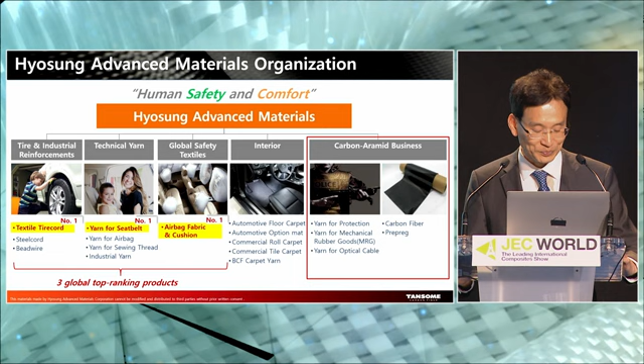Hyosung Advanced Materials, which I belong to, has a motto of 'We assure human safety and comfort through optimized advanced materials.' It has 5 business divisions. The reinforcement division makes tire cord made of polyester and steel. Technical yarn division produces high-strength industrial yarn. Global safety yarn textile produces airbag fabrics and cushions. Interior division manufactures carpet products for vehicles. Carbon aramid division, which I belong to, deals with carbon fiber and aramid fiber businesses. This division is the newest one in the company, but is also the fastest growing division as well.

Okay, from now on, I'd like to talk about Hyosung's carbon fiber product, TANSOME. TANSOME is the brand name of Hyosung carbon fiber. It's a combination of tan and something, which implies that people can make something special or extraordinary using Hyosung's carbon fiber products.

Now I will explain the brief history of TANSOME. Hyosung began its R&D in 2008 and developed H2550, a high-performance standard modulus product and precursor simultaneously within 2 years using our own technologies. In 2012, the company developed H3055, an intermediate precursor and carbon fiber, also using our own technology. In 2013, it started commercial production with a 2,000 ton plant in Jeonju, South Korea, and has since increased its capacity to 9,000 tons as of today.

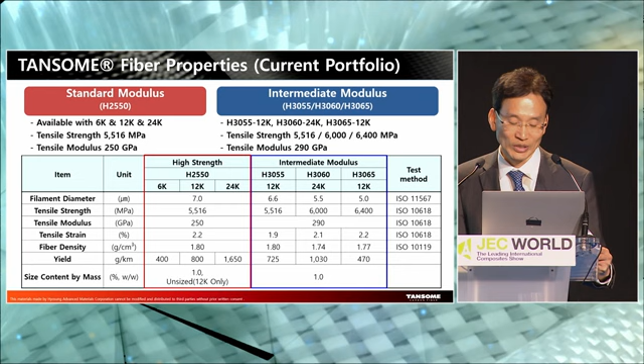Now, the company has 2 types of products: a standard modulus product and an intermediate modulus product, respectively. The detailed characteristics of the products are shown in the table. The main feature of the standard modulus product is its high tensile strength. For example, in the field of high pressure vessel application, it has received a lot of positive feedback from many customers, and it is growing its sales rapidly for this application.

Hyosung is on its way to expanding its product portfolio. In 2019, the company developed an unsized product for thermoplastic composites. And last year, developed a high-strength intermediate modulus product, H3065, in collaboration with Korean academic institutions.

The H3065 is a high-strength intermediate modulus product, developed through collaboration of industry, universities, and institutions such as KAIST, KIST, KCARBON, Jeonju University, and Hanbat University. Hyosung took the lead in developing the precursor and carbon fiber, while other domestic institutions and universities were mainly in charge of carbon fiber analysis and processed products related aspects.

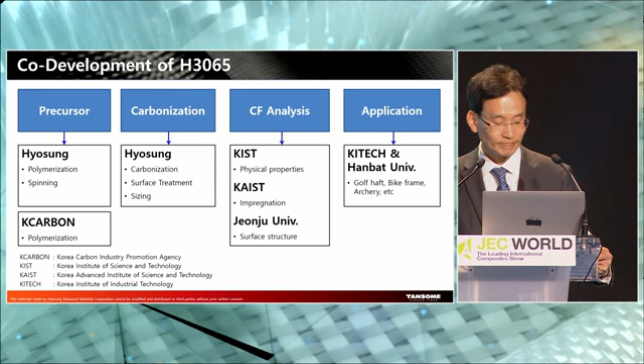Let me briefly introduce the target properties of the high modulus product line. The company plans to cover the modulus range from 325 to 430 gigapascal and aims for strength up to 7 gigapascal. Once development is complete, the company will proceed with promotion accordingly.

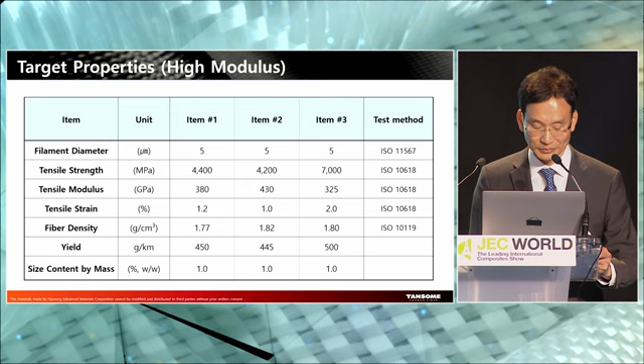While the company basically focuses on developing carbon fiber for aerospace applications, it is currently also working on developing resins and prepregs. The primary goal is to develop resin systems that meet aerospace requirements. Furthermore, it plans to evaluate composite material properties through the oven curing of high toughness prepregs.

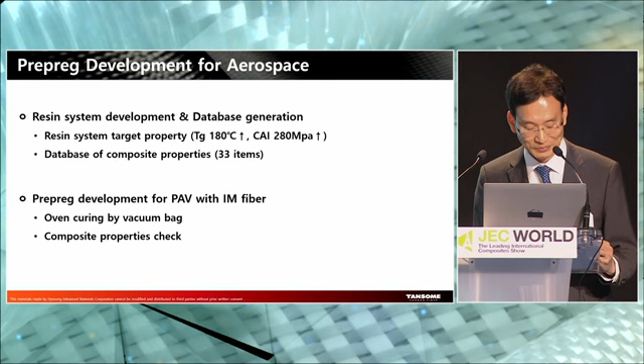This is a photo of our production site in Jeonju, South Korea. The company is currently operating up to 4 lines. As you can see on the right side of the picture, it already secured an additional expansion site where 6 additional production lines can potentially be added in the future.

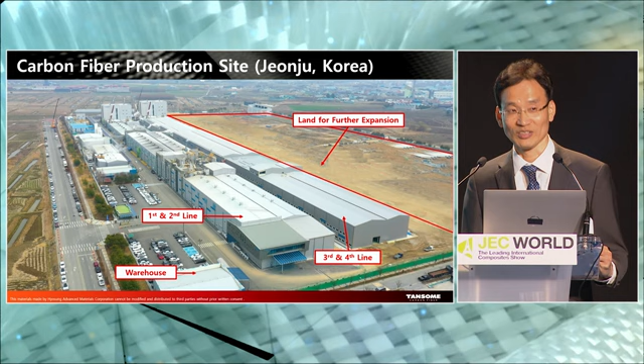Thank you. Thank you for your patience.

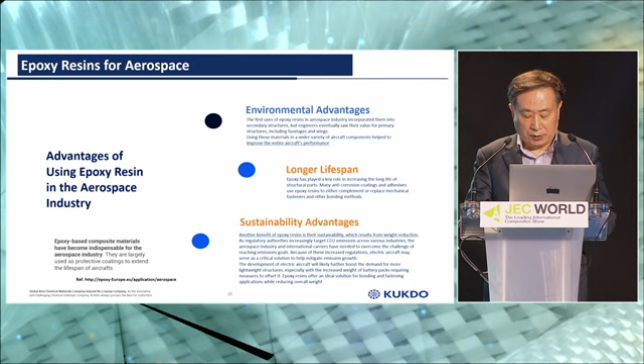So regarding aerospace, why do they use epoxies for composites? Because of environmental issues, longer lifespan, and sustainability advantages. Regarding the composite market for aerospace, what kind of epoxy are we supplying, and what development are we doing? Of course, for epoxy resin for aerospace, we supply bis A type and bis F type, but in many cases, because of heat resistance or mechanical property and high performance requirements, we supply high performance epoxy resins such as amino epoxies, multi-novolac, and toughened epoxies. We also supply these as a system - resin with additives or reactive diluents, as resin part and hardener part. And regarding sustainability, we are focusing on bio, what we call green composite, for aerospace, for both the interior and structure side.

We are developing new chemistries, not BPA-based, not petrochemical, bio-based epoxy resins. And also, we have responsibilities about recycling, so recyclable epoxy we are developing.

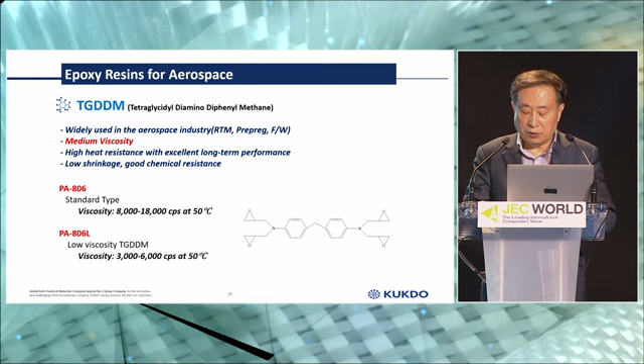This is the most popular grade for the structure part of aerospace, tetraglycidyl diamino diphenyl-methane. It has very high heat resistance, and we have 2 different grades of distilled materials of these amino epoxies. This is 3-functional, we call the triglycidyl para-aminophenol and meta-aminophenol.

We have PA-805 and PA-808, these 2 grades. Also, they are popularly used for this kind of products.

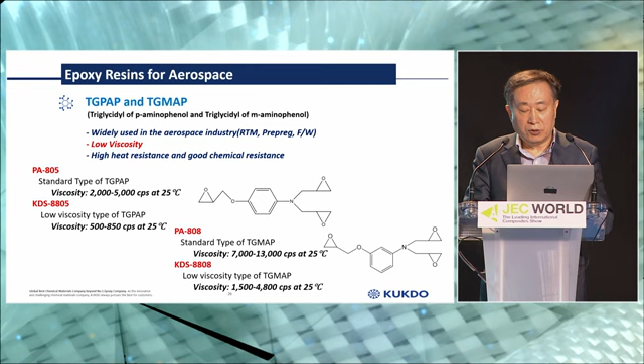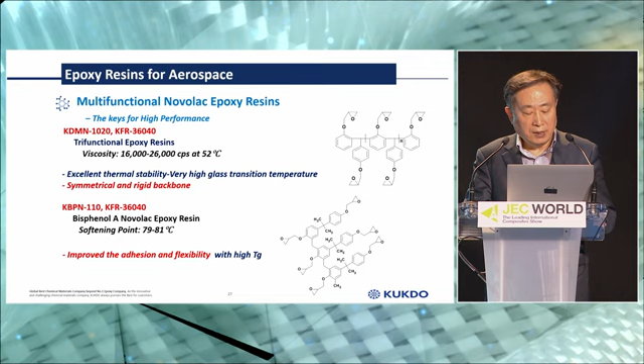We are also developing and supplying the market multifunctional novolac resins, mostly for heat resistance and high mechanical properties. So bisphenol A novolac epoxies or bisphenol F-based novolac epoxies, multifunctional, you can easily have more than 200 degrees Celsius of heat resistance, for high TG purposes.

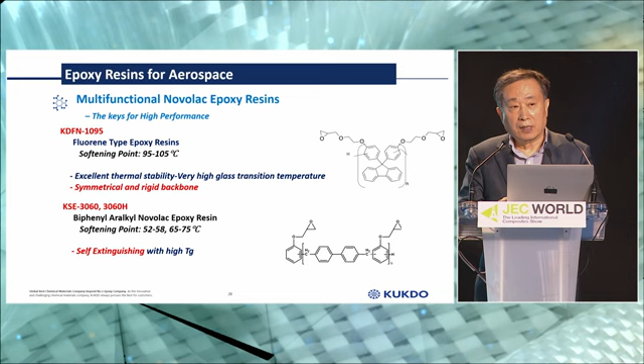This is the multifunctional novolac system. We are manufacturing this novolac resin for our internal captive use. So we can design many different types of novolac resin, like multifunctional or BPA novolac, this kind of things.

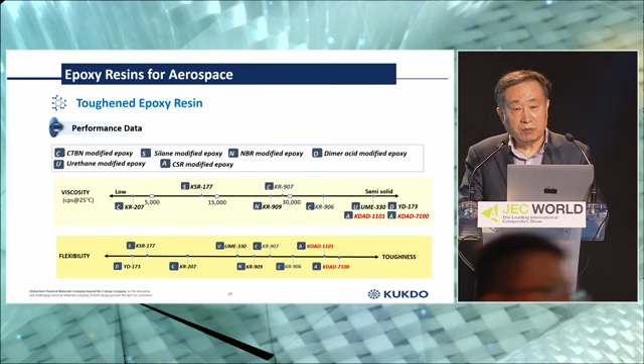For details, if you have questions after my speech, you can ask me separately.

Recently, the aerospace area, aircraft makers want to have mass production. In the past, aircraft makers didn't mind the cost, but now they're competing to achieve low cost, fast manufacturing. So they used to do many different processes, but recently, not pre-preg autoclave, they want fast track, fast curing with RTM, resin transfer molding system.

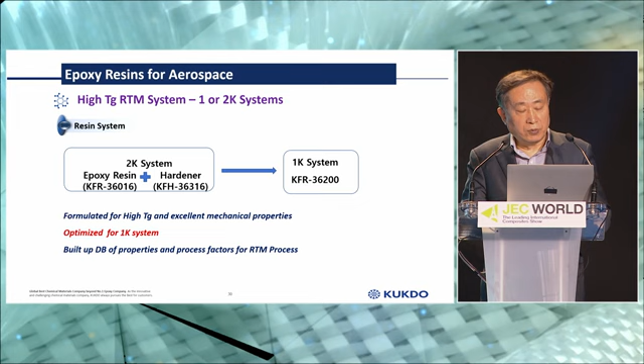So we are introducing to the market resin transfer molding for structure parts of the aircraft. This RTM system provides high mechanical properties, fast curing, and high heat resistance, as you can see.

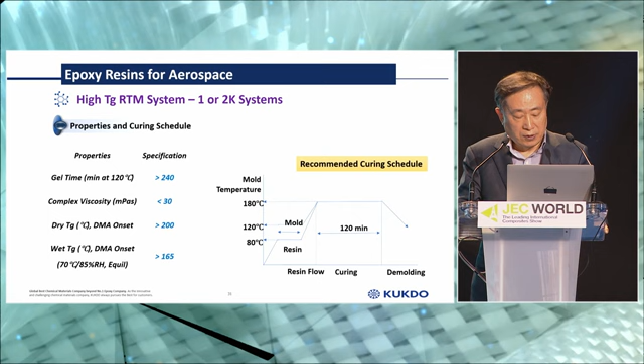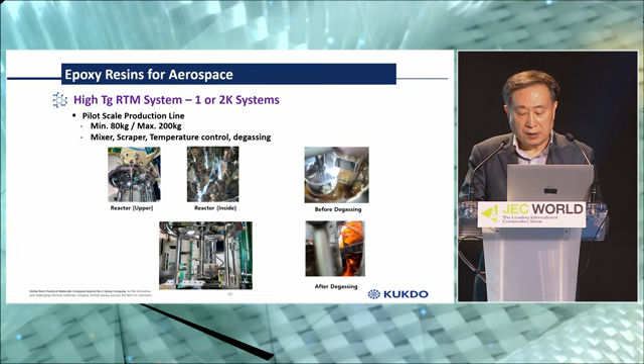And this is the evaluation result and the process of how we achieve that.

Now we talk about sustainability. Carbon neutral - every country has some national net zero commitments, and Korea is also following that. Kukdo is trying to make bio-based epoxies and recyclable systems.

As you can see, glycerin-based ECH, we call it partly bio epoxies or 100% bio epoxies. We are supplying the market, especially in Spain and in Europe, like in France, supplying our important customers with this kind of bio epoxies to make sports boats or other composite materials.

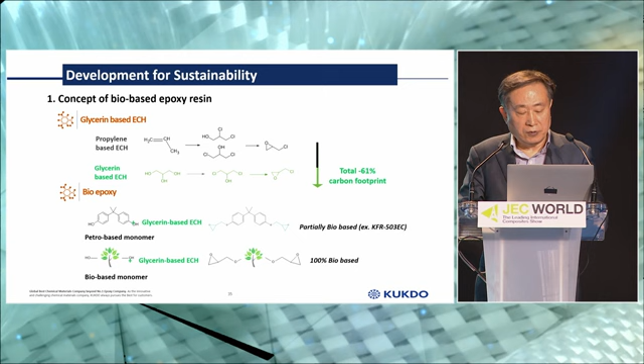And also for aerospace, we are trying to make it with the infusion system or prepreg system based on these bio epoxies. Our target for bio epoxies by 2025 is a 100% bio system, which means not petrochemical epoxies.

Already for wind blades, some wind energy applications, we are supplying and being evaluated with our system, bio content around 45%. You don't need to change cure conditions, and you can have high performance cured properties without difficulties.

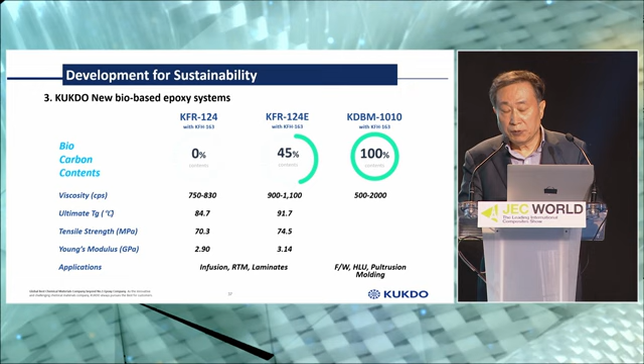So, Kukdo recycling: now carbon composite or glass fiber composite is being used for many applications. And now, like wind energy, wind blades, after 25 years we have concerns about recycling.

So we want to have an easy and low cost recycling system based on different chemistries, 100% bio, self-degradable epoxy systems, but which have good enough mechanical properties. So now Kukdo is introducing to the market, for sustainability, bio-based epoxies, and developing bio-based epoxies.

We are co-developing with a university, and there is a company, KCTech, in Korea. They are very strong in recycling technologies. So we are introducing self-degradable or bio-based epoxy which is easy to decompose, and they are developing the process.

So we have the facility, the company's technology of the process, and the new chemistry. We can have a very good sustainable epoxy system.

If you want to have some trial for the bio-based one, I believe at this moment we don't have mass production, but from this year, from September, we are going to start mass production of the 100% bio epoxy, and we are recommending it for any applications.

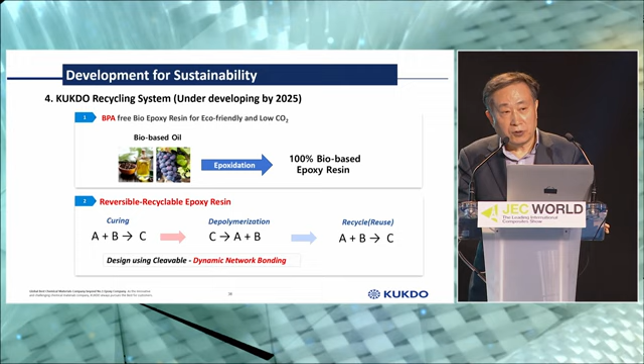Dr. Park, thank you very much.

Moving on, our next speaker is Yoonho Cho, Managing Director of Hankuk Carbon, the largest producer of composite intermediates in South Korea. He'll be telling us about how just such an intermediate composites company fits into a sustainable aero-mobility future.

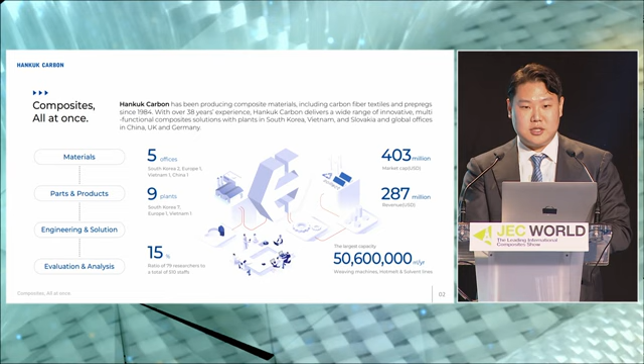Even though we've been struck hard during COVID, financially we expect to forecast nearly $350 million this year, so we're seeing some post-pandemic market drive. We have 9 plants in Korea, Vietnam, and Slovakia, with representative offices in China, Germany, and UK.

Our business areas have been focused on automotive, aerospace, sports and leisure, construction energy carriers, and electronics. We're a very small company, but we are in very different and big industries. We're here talking about future aero-mobility, and one of the core functions we see in the future is bringing different aspects of industries together.

For instance, UAM, urban air mobility - we're seeing lots of technologies that we would expect to use in the automotive industry, but using aerospace qualifications and certified methods of production.

Our core technology comes from weaving and impregnating fabrics, whether it be UD, NCF, or plain weave, and then manufacturing these intermediate materials, whether it be RTM, PCM, or autoclaving. We have our own in-house facility, not because we want to be involved in all methods of production, but because we needed to accelerate and get fast feedback on the limitations of what we can do at different methods of production.

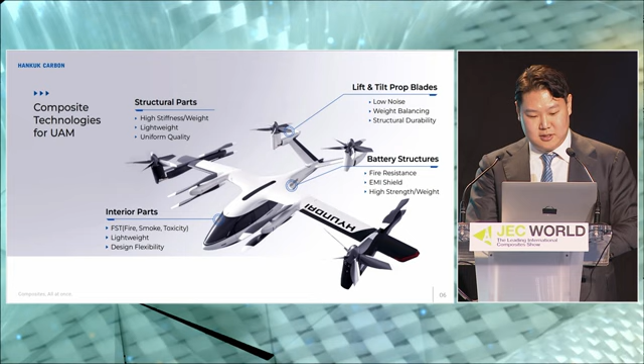Regarding this aspect, for structural parts, we are using epoxy-based prepreg with high toughness and high TG. It is under validation at the moment, but we believe this will be ready in the market within coming years.

Flexible cure methods is something we are also working on, B3HT. It's a type of prepreg where we can have different staged curing cycles.

For interior parts, we're actually a Boeing certified supplier for interiors. We already have AS9100 and we are listed on QPL, and we're supplying phenolic-based prepreg for aerospace industries.

This is a concept of fast curing for us. We believe that in order to compete against metallic-based structures, we need to be able to cure and manufacture parts within minutes. This is where we hope our technology can be used in the UAM industry. So our target curing time is to be under 4 minutes for all cycles of prepreg.

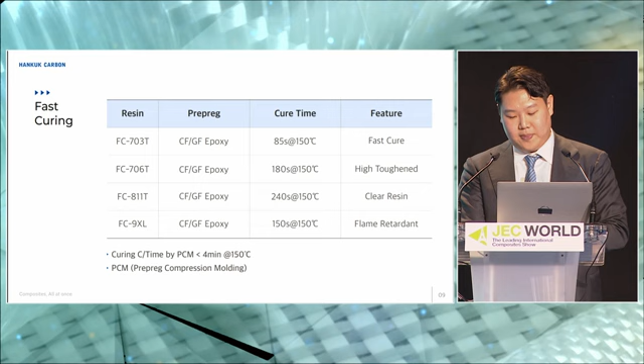Flame retardancy, again, I think will be a more and more important factor in this industry. As you see, a lot of electric cars are becoming an issue with flammability, and we think this will also be the same for urban air mobility. So we're bringing a fast cure resin system with high flammability resistance.

These are the 4 main products we have in line. The FC9 XL series has been awarded the JEC Innovation Award in 2020, but we have yet to use this application in an actual product. We're still in R&D phases, but we think by the end of this year we'll have some good news, and we'll see actual product realization within this year.

This is a common sandwich structure panel, but I put this into this presentation because you cannot have one perfect composite material that can serve all functions. We want to be a composite company that can supply multi-function, multi-material sandwich structures for press compression molding technologies.

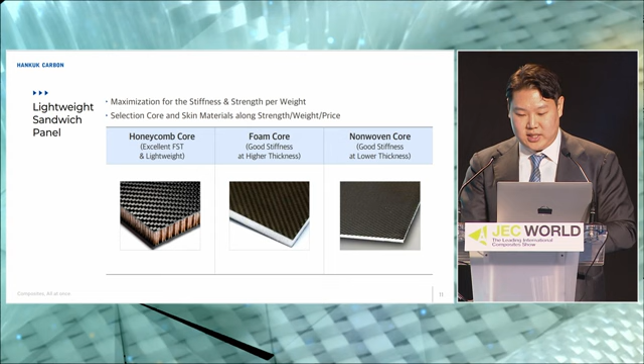Internally, we have engineers of nearly 79 people out of 510. So we're investing 15% of our HR into engineering, and one of the core functions we're investing in is how to realize from prepreg to an actual product.

Through government programs and collaboration with companies, our strength is in developing the iron bird—actual iron birds and thrust test rigs—to test what is the optimal power pack solution for UAMs. So with ground electricity and with inverters and motors, we would develop a prototype of a propeller blade, and then through optimization, finding what is the perfect RPM for this motor, what is a good shape and structurally what kind of propeller we need, is our core strength.

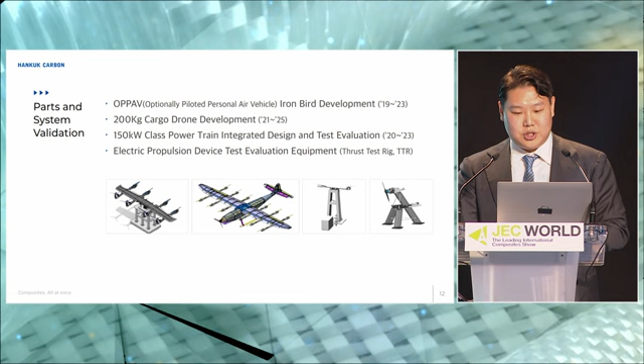We're currently involved in 4 different kinds of programs. One is the optionally piloted personal air vehicle, which is doing a flight test right now with our material and our propeller. With LIG, we're developing a 200 kilogram cargo drone. Another government program led by us involves developing a 150 kilowatt class power train solution, which we're evaluating.

Finally, for sustainability, there's very limited things we can do as an intermediate company. We believe what we can do right now is being ready for the future. And how we can be ready for the future is, as mentioned, being in the automotive industry for mass production, being in the existing aerospace industry for qualification, certification and providing quality, and thirdly, how to make our company environmentally friendly.

One of our efforts in doing so is using 40% of all our electricity consumption through solar panels, which is already established. We're constantly checking our life cycle carbon footprint, and we're investing in how to recycle our used carbon prepreg and extract carbon fiber from a finished product.

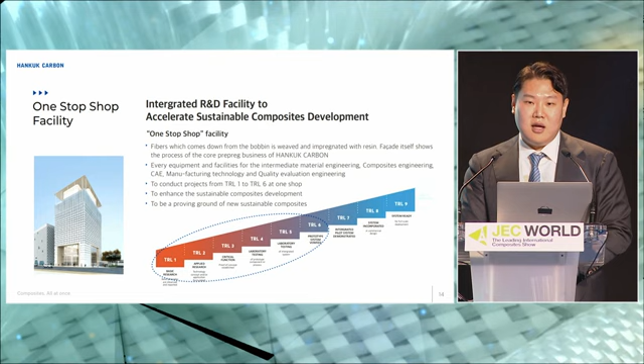Finally, I want to say we have a new R&D facility in the Gimpo area, which is 10 minutes from Gimpo airport and about 35 minutes from Incheon airport. We believe this one-stop shop facility, where we can collaborate with lots of different companies in the world, will allow us to develop from TRL level 1 to level 6. We want to be the one-stop solution for prototyping from materials to an actual product, and we hope this will be the proving ground for new sustainable composites.

I tried to keep my presentation short, but I hope it isn't too short. If you have any more questions, feel free to visit us at N22 at Hall 5. Thank you.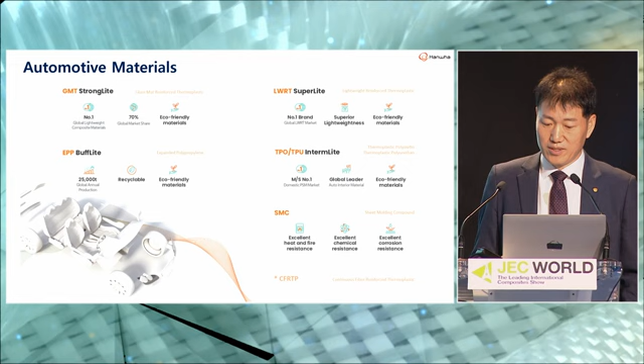We have glass mat reinforced polypropylene and chopped fiber lofted reinforced lightweight reinforced thermoplastic (LWRT), expanded polypropylene, TPO and TPU sheet, and thermoset sheet molding compound. Lastly, we can supply continuous fiber reinforced polypropylene and polyamide.

We are now trying to develop other kinds of materials. I think I'll have a chance to introduce something new in the future.

Based on the various kinds of material technology, we have developed various processing technologies in our global plants. I think Hanwha has outstanding strengths in the field of compression molding.

So you can see, for example, GMT compression molded rear bumper beam, front stiffener, and seat back. We can also supply LWRT based headliner, body undercover, luggage board, and so on.

We are now trying to find some new applications with a cost-competitive solution.

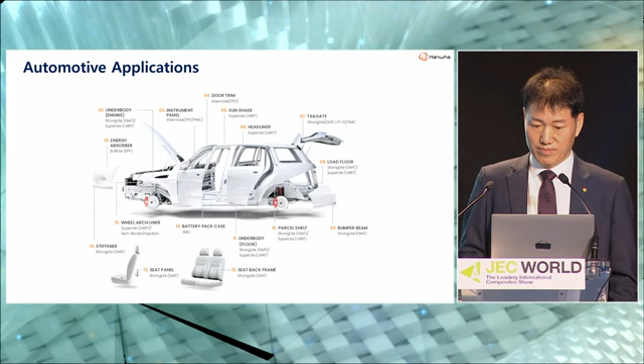The other area we are focused on is solar materials, such as ethylene vinyl acetate (EVA) sheet for solar cell encapsulation, and polyester type backsheet.

We have a close partnership with Qcells, a module maker. They would invest $2.5 billion to build solar power manufacturing value chains in the United States. So we are also investing in the USA to expand our manufacturing capacity.

From now on, I'd like to share some information about our ongoing projects. Let's get down to something new.

The first one is composite parts for electric vehicles. We have worked on battery upper and lower cases based on an existing platform, meaning it can be used for both ICE vehicles and electric vehicles.

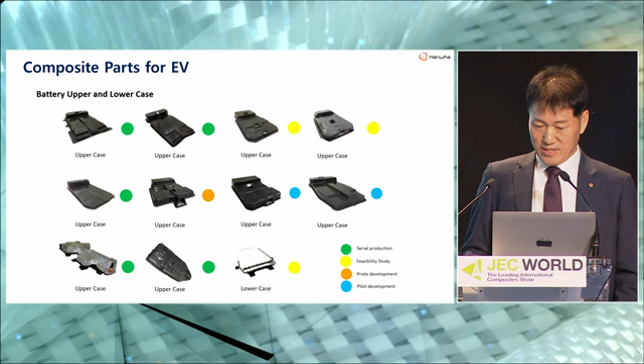Recently, there are some car OEMs adopting their unique skateboard platform. That makes us develop a high impact toughness SMC.

So we developed a hybrid concept, meaning the combination of short fiber reinforced SMC to obtain processability with woven fabric reinforcement to improve impact toughness, to protect against external shocks during driving.

Recently, we are going to produce parts for Kia EV9, and we are talking about more projects with Hyundai and Kia.

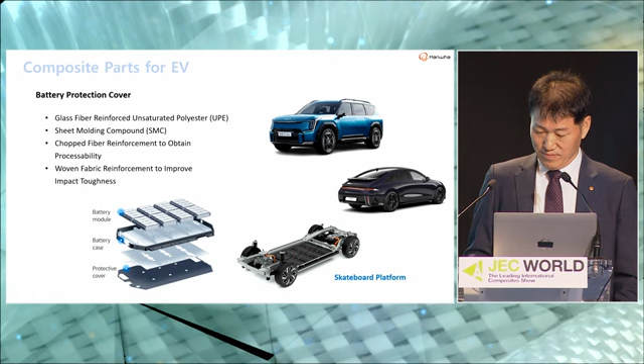The second one is fairing parts for eVTOL. There's a need to make a nacelle for the XP1 butterfly from Overair, a component maker in the United States.

We tried to use a vacuum bag only curing process instead of autoclave technology to reduce the part cost and reduce the investment cost.

If you want to see the nacelle prototype, please visit our booth in Hall 6.

We tried to optimize the processing condition to make that kind of big part. It was not easy to optimize the temperature and time and so on, but we could make the right manufacturing process.

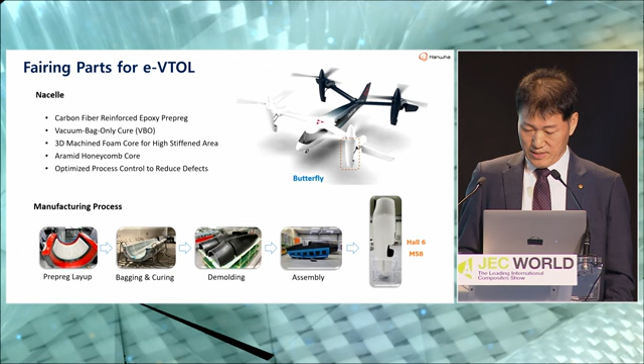The next one is about 3D printed parts for satellites. We are co-working with Satrec Initiative, a high-resolution imaging satellite maker headquartered in Korea. We want to use carbon fiber reinforced PEKK, polyether ketone ketone.

We tried to use dual nozzle 3D printing, followed by compression molding, to minimize the defects. It's a small but very high performance part, so we tried to use 3D printing technology instead of autoclave.

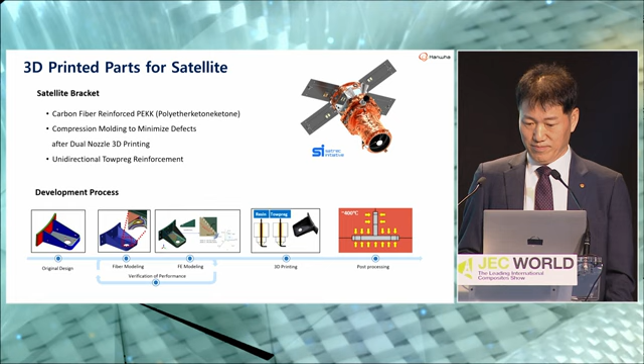The last one is pultruded parts for solar modules. There was a demand from our customer to replace the aluminum frame with a composite one.

We made the decision to apply pultrusion as a molding technology because it can form a continuous fiber reinforced three-dimensional profile. We considered polyurethane as a base material instead of epoxy to reduce the material cost.

We also considered a closed injection box to get better impregnation of glass fiber during the process.

We optimized the shape and thickness based on FEA simulation and thermal expansion analysis results.

Recently we got feedback from our customer that the composite-applied module passed all kinds of engineering specifications, including wind pressure, snow pressure, flammability test, and so on.

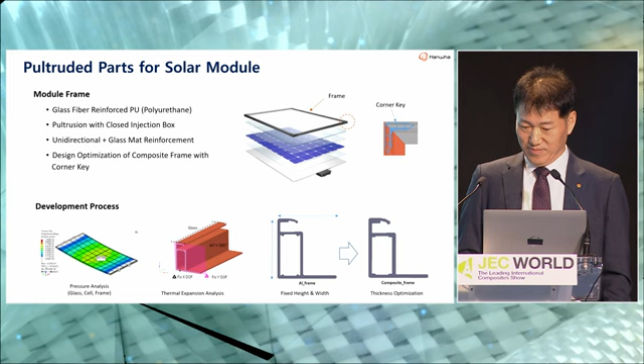I looked around Hanwha's current business areas and some ongoing projects. What will be the most acceptable technology for future mobilities?

In my opinion, there will be new opportunities for composite researchers and engineers interested in purpose-built vehicles and advanced air mobilities.

I think the above mentioned technologies—SMC, VBO, 3D printing, and pultrusion technology—will be good candidates for future mobilities.

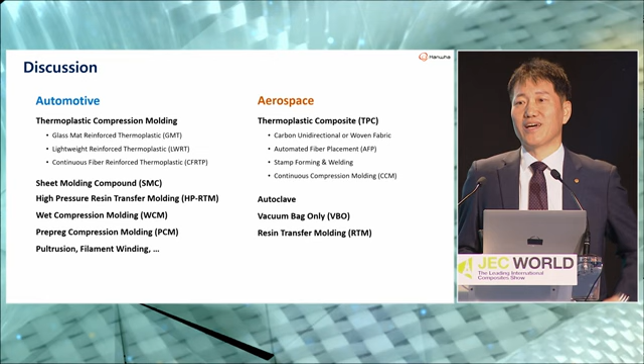The last thing I'd like to say is that Hanwha has accumulated experience with thermoplastic composite materials and thermoset composite materials, and all kinds of processing technologies. We are ready to have an open discussion with all of you.

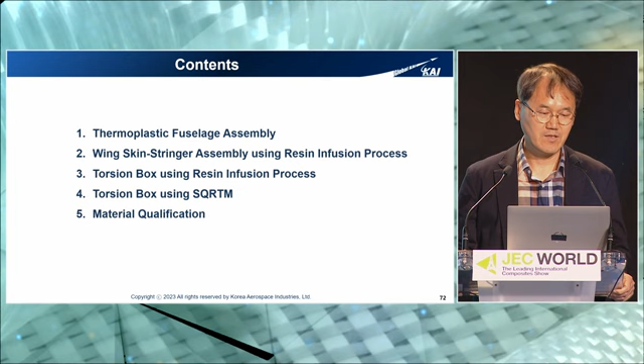KAI targets to make more than 60 aircraft per month with equivalent quality and cost. The last topic is material qualification.

For the thermoplastic technology, KAI wants to implement the whole fuselage structure with thermoplastic materials. We selected LMPAEK material with unidirectional tape. For the large skin, we selected an AFP machine to lay up the large curved skin and oven consolidation, not autoclave consolidation. For a long stringer, we selected a continuous compression molding process, and for smaller parts such as frame and clips, we applied a stamping process.

We also pursue eco-friendly manufacturing technology by using recycled materials to make the window frame. Finally, we are conducting induction welding and resistance welding processes for the final assembly.

You can see the final part configuration, which is 3 meters by 2 meters in size. We finished the TRP, technology readiness part, in 2021 successfully. This program is ongoing, and by the end of this year it will be finished.

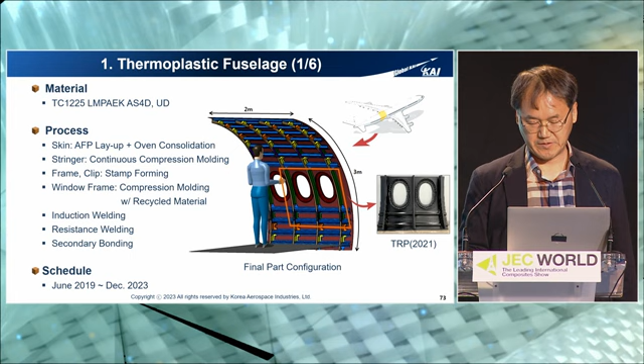This slide shows the skin manufacturing process. We selected 0.25-inch tape, with an AFP speed of 0.5 meter per second. You can see the bagging process and oven consolidation process. We conducted C-scan to detect internal defects and 3D scanning to check the final part design, dimensions, and tolerance.

We also conducted destructive tests to check the internal quality of the part, and DSC tests were conducted to check for the existence of cold crystallinity.

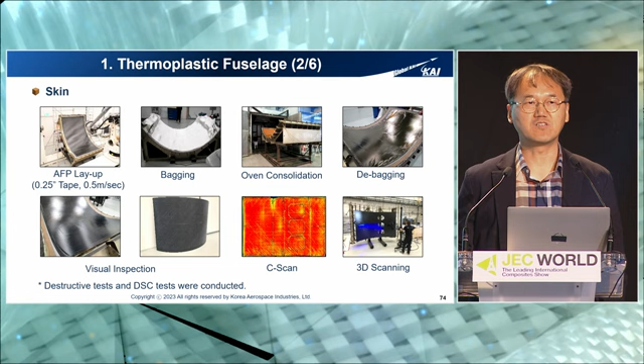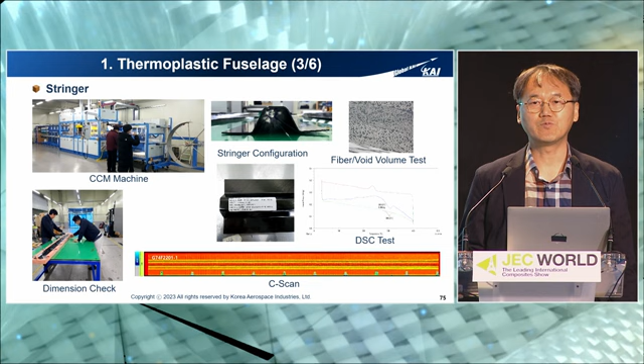This is a CCM machine used to make the stringer, having a hat-section profile. We conducted fiber volume and void volume tests, accepting a minimum percentage of void volume, along with dimension tests, DSC tests, and C-scan. We spent a lot of time checking the optimum temperature, time, and pressure, and we finally got the optimal process window currently.

For the frame and clip manufacturing process, we used 2 kinds of presses. The bigger one is a 400-ton press with a 2 meter by 1 meter bed size. The smaller one is a 100-ton press, with a size of 0.5 meter by 0.5 meter. Both presses have IR heaters to provide high temperature just before applying pressure.

KAI is developing several kinds of configurations, such as frame, stabilizer, double folded clip, long clip, and L-shape parts. The difference from previous technology is that we used unidirectional tape pre-preg, not fabric. We conducted destructive and non-destructive tests to check internal defects and quality issues.

Void volume and DMA tests were also conducted. Most of the results are within our expectations.

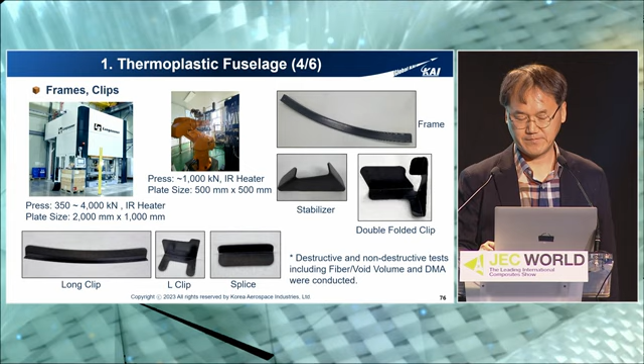As I mentioned, for eco-friendly manufacturing technology, we shredded and crushed previously consolidated parts to make recycled material with approximately 1-inch fiber length, and we added extra resin pellets to provide more viscosity when heated, to make the mix. Finally, we achieved a 30% fiber volume window frame.

Currently, to give more structural reinforcement, we are starting to apply pristine, semi-prepreg material over the window frame structure.

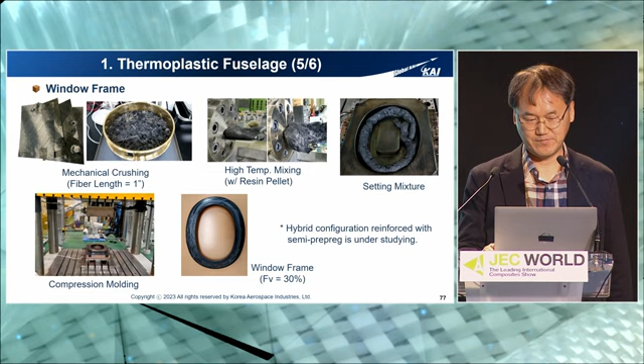This part development program will also be completed within this year. I hope to explain with the real final assembly next time.

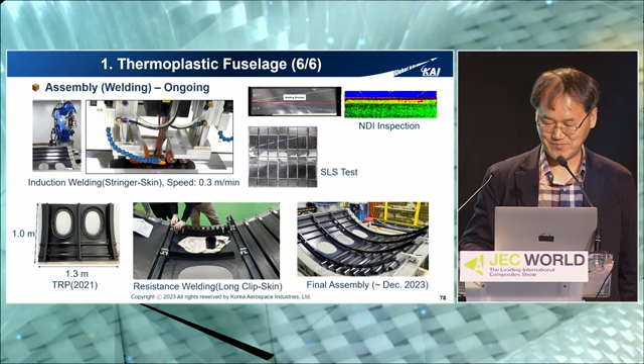Second one is the wing skin stringer module in KAI. We selected HiTape unidirectional dry tape material, 0.25 quarter-inch unidirectional tape, with resin system RTM6-2. For the large skin, we laid up with the AFP machine, and for the stringer, after lay up with the AFP machine, we used a hot drape forming process to make the L-shaped tie.

We also conducted TRP parts in 2021. You can see the final part size, 4.1 meter by 1.5 meter, with some controlled parts.

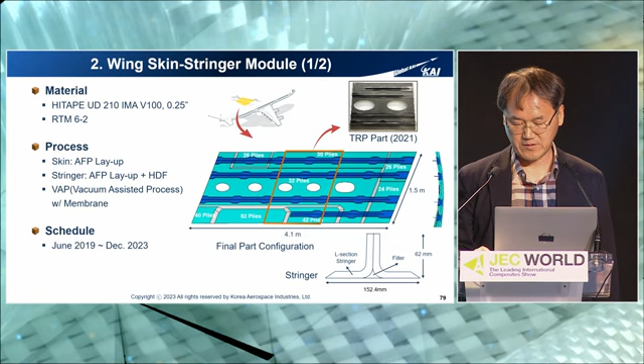This slide shows the manufacturing process. The AFP machine speed was 0.6 meter per second. You can see the hot drape forming pictures.

The difference from the previous one is the relatively lower temperature hot drape forming, meaning 120 degrees Celsius, compared to the 170 or 160 degrees Celsius hot drape forming used previously. This will also be completed at the end of this year.

Currently, we finished the final parts manufacturing assembly tools, and we are nearly complete with the preform manufacturing for the large wing skin and stringer.

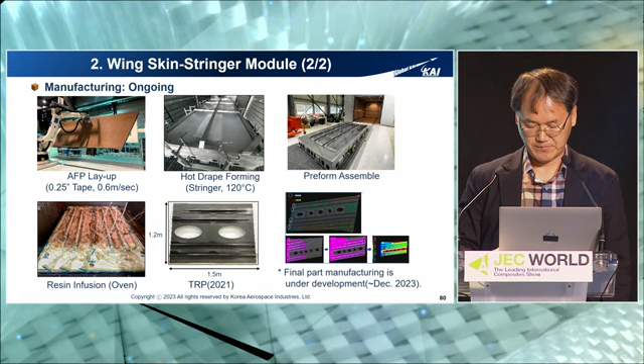Third topic is the torsion box made with the resin infusion system. The main difference from the previous large wing skin stringer module process is that we selected a QISO material system, meaning 3 different layers woven as one layer: 0 degree, 60 degree, and -60 degree layup as one ply.

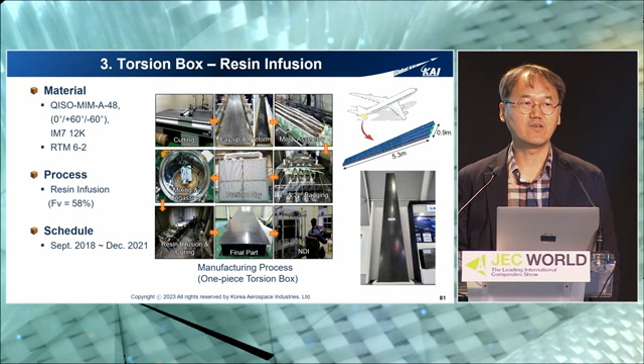You can see the part size on the right-hand side of the picture, 5.3 meter by 0.9 meter. This is a one-piece torsion box. We displayed this actual part at the JEC Asia show in the past.

This slide shows the SQRTM process. We selected Hexply 8552 prepreg material, which is a plain weave system. We demonstrated 1.2 meter by 0.4 meter demonstration parts.

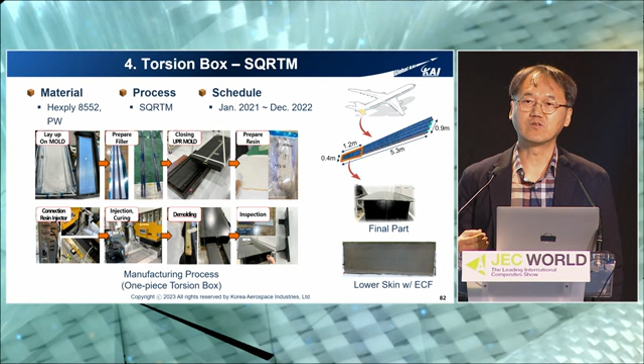We also applied expanded copper foil to protect against lightning strike. This is also a one-piece torsion box. We conducted every mechanical and physical test after completing the parts and during the parts manufacturing process window, and most of the outputs and results are within our expectation.

This is the last page, material qualification. Korea has a material qualification approving system from the government. This is very important to applicants because previously applicants could only submit material qualification during the type certification submission. But currently, we can apply for material qualification to the government side.

KAI submitted 3 kinds of material systems to the government side, and we actually approved PCD of a material manufacturer side in the past, last year. Currently we are developing material tests to generate material allowables.

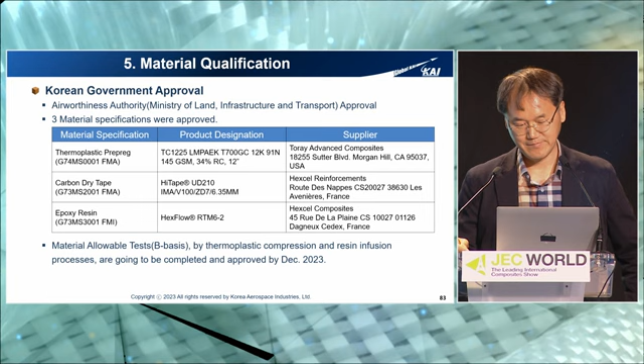Thank you for your attention, and I appreciate all participating companies for their efforts to make this successful demonstration part technology with KAI. Thanks.

Dr. Song, thank you very much. I think what we'll have to do now is a question speed round. Does anyone have a burning question they've been waiting all this time to ask? Raise your hand, I'm told there are microphones going around. Anyone? Is everyone very shy because it's early in the conference? Everyone wants to talk to you later, privately. I'm reluctant to start a brand new topic with just one question, so that's the presenter's prerogative, I will speak to you separately. We will call that at the end of the session because, as everyone knows, JEC is extremely well-planned, relentless frankly, so we will let you get on with what's next.